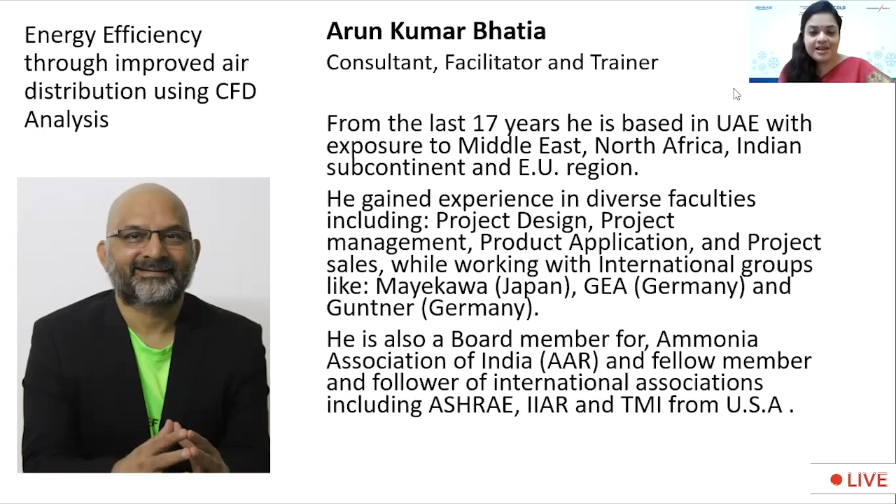Thank you, Nuremberg Messe, REFCOLD India, and entire team working in refrigeration and cold chain industry. So today's topic, which I've been given responsibility, related to air movement: energy efficiency through improved air distribution using CFD analysis. CFD analysis, I think, is still an upcoming subject. It is still a new thing for the cold chain industry, especially in our part of the world where we are currently residing. But in Europe, it is popular from a long time.

Now the topics I will talk today are divided as follows: first of all, we talk basics, which is refrigeration, and then we talk about air management, which is related to the topic. Then we come to our core subject, which is CFD, computational fluid dynamics. And then we go ahead with a few case studies just to explain whatever we have gone through. And then there'll be a question and answers. So let us start the presentation.

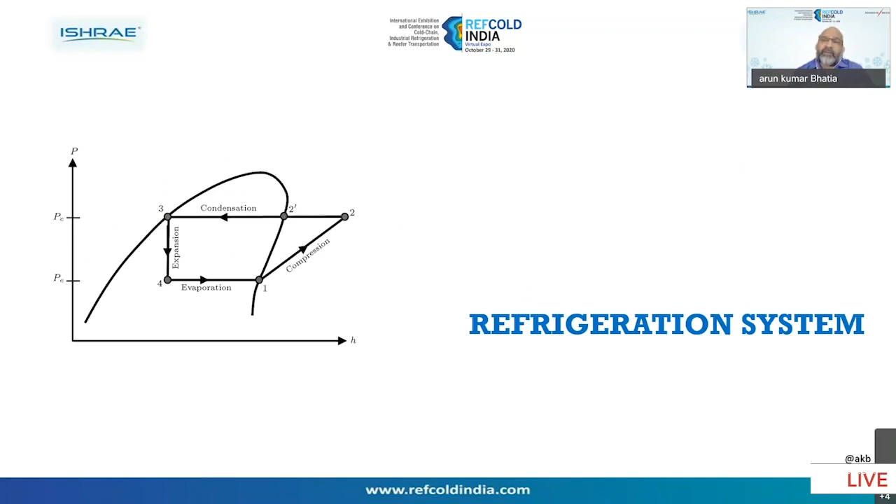So a normal vapor compression refrigeration system has a condenser, a compressor, an evaporator, and an expansion valve. And if I have to analyze the system, this is the way energy is consumed, or I must say, the stakeholders in energy consumption. So compressors, of course, will consume most of the energy, and then coils are the most important part of any cold chain or food chain application, where air coolers or air cooling coils consume a lot of energy.

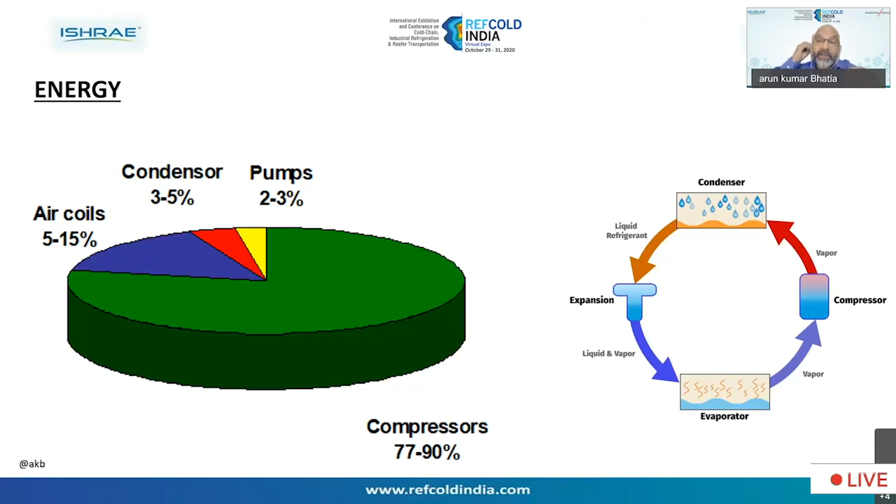So today our focus will be to understand how we can reduce, optimize, or help people understand that there is a possibility, there is a scope for us to save energy. Now this is very much related to air management. So if we are able to manage air properly inside the chamber, definitely we can save a lot of energy.

So air, as I remember, one of my mentors in Netherlands used to tell me, air is very stupid. So you just blow air, and it will go wherever it finds a path. So let us see how air behaves in a chamber and how we can get to know energy saving techniques using air management.

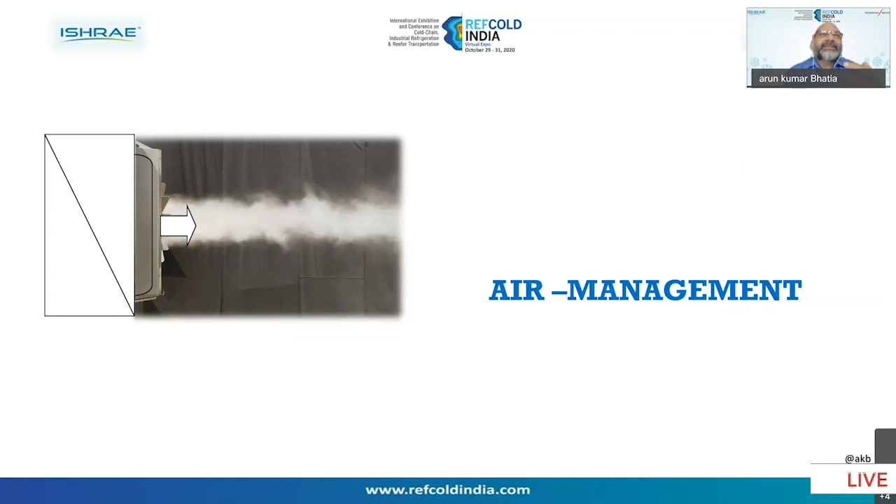So the game we are getting into is energy saving, and we have very limited scope where we have airflow, air throw, coil capacity, air temperature, and who are our opponents. The opponents inside the chamber are the racking system, the packing of the product, the size of the product, size of the store, material to be stored, and the temperatures.

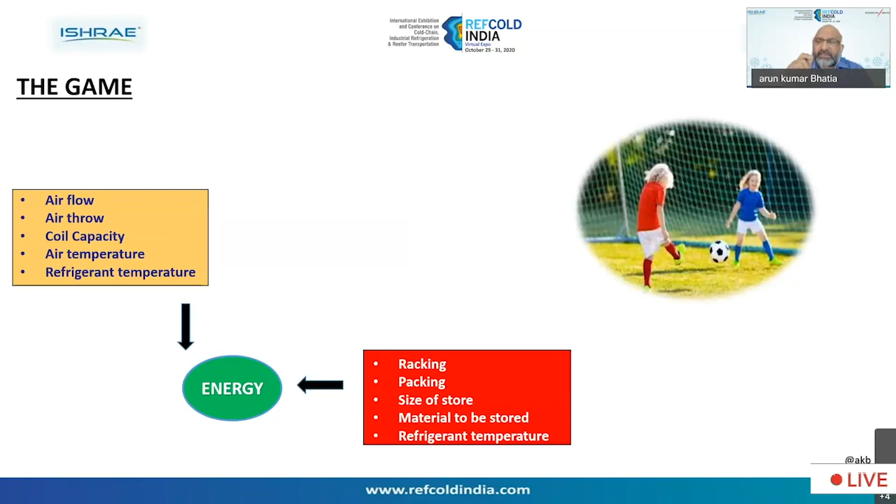I think the air evaporators, or air coolers, or AHUs, or whatever you call them, there is a tremendous scope to get energy savings here. And these energy savings can be achieved by a few simple things. Let us go ahead and understand how we can save this energy.

So what does air do in a cold store, or in a cold chamber? It goes with speed, which we call velocity. It goes with volume, we say flow, and it carries a temperature. So basically, three properties which are the most important are velocity of air, temperature of air, and flow of air. These are three important parameters or properties which we have to analyze, and this will help us define how much energy savings can be done.

Now, what I have been understanding, what I have felt, and what I learned from many research studies and from my mentors and the cold stores we have done, is that we can achieve double digit savings, which can go up to 15, 16, 17% if we do our air management in an optimized manner. So let us go ahead and see and learn.

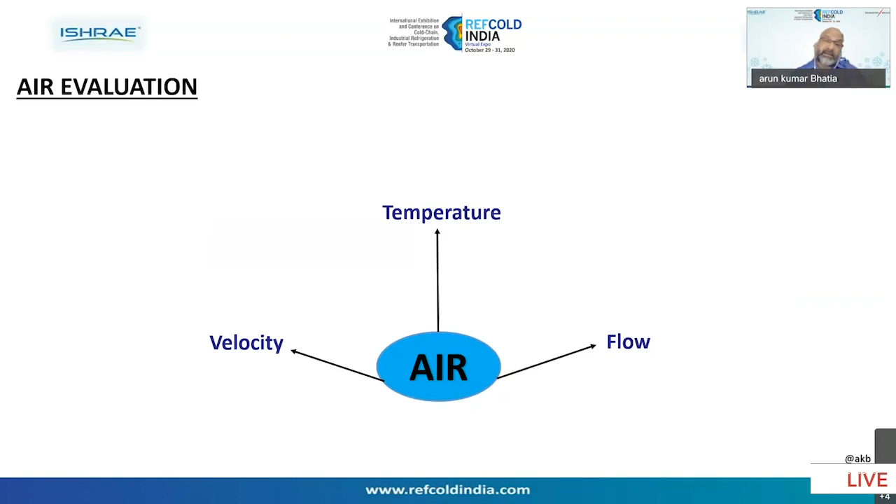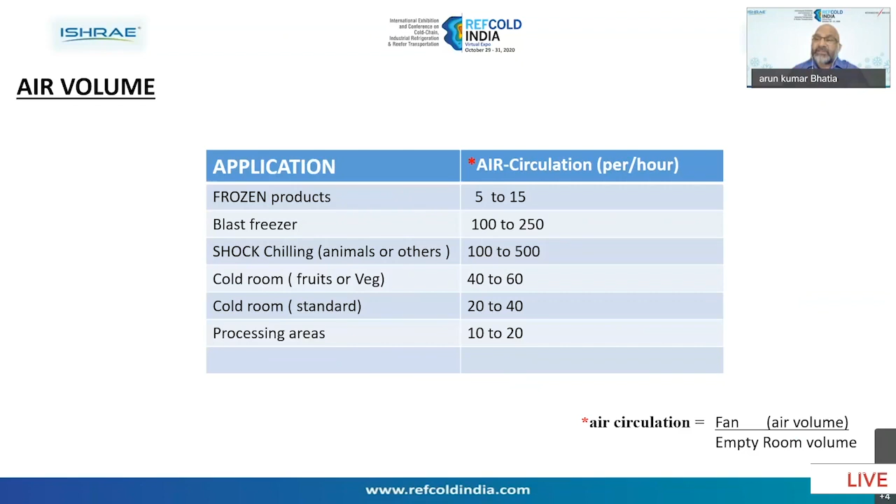Now the second important point is air throw. If we understand the name logically, it is how much air we can throw. If I am putting evaporators or air coolers at one side of the room, the end of the room should be covered. If I am producing air at -10, -5, -20 or -30°C at the exit of the evaporator or air cooler, it should be able to reach the end of the room. The product stored at the end should not face any hunger in terms of temperature management, so products in front rows get the same equal treatment, which is essential to maintain product quality.

Now in standard evaporators, we use two types: one blowing downwards and another blowing horizontally. The case studies I will take are also related to these two kinds of evaporators - one with horizontal flow of air, another with vertical flow of air.

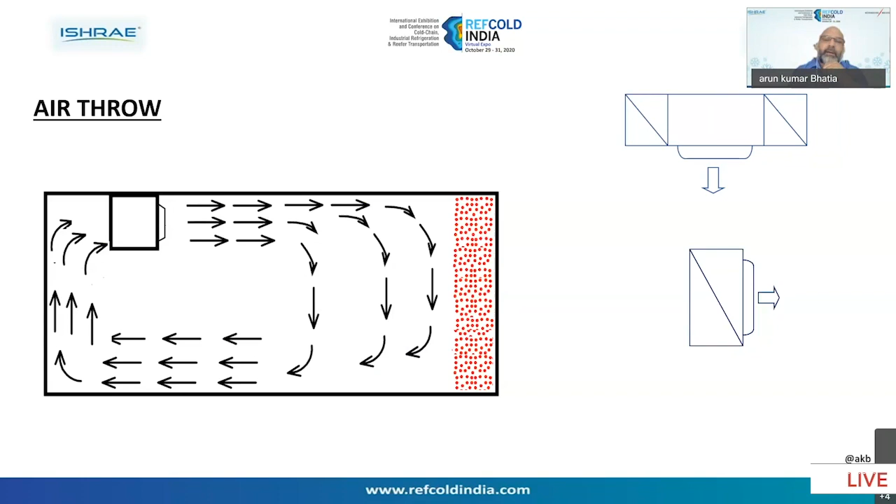The next important point is temperature management inside the cold room or chambers. If I am producing X temperature of air, it should reach the entire room, and this must return to the air cooler. If the air is not returning properly to the air cooler, there is a lot of efficiency at stake. So we have to make sure that whatever air we generate of X volume and Y degrees Celsius comes back with a proper flow.

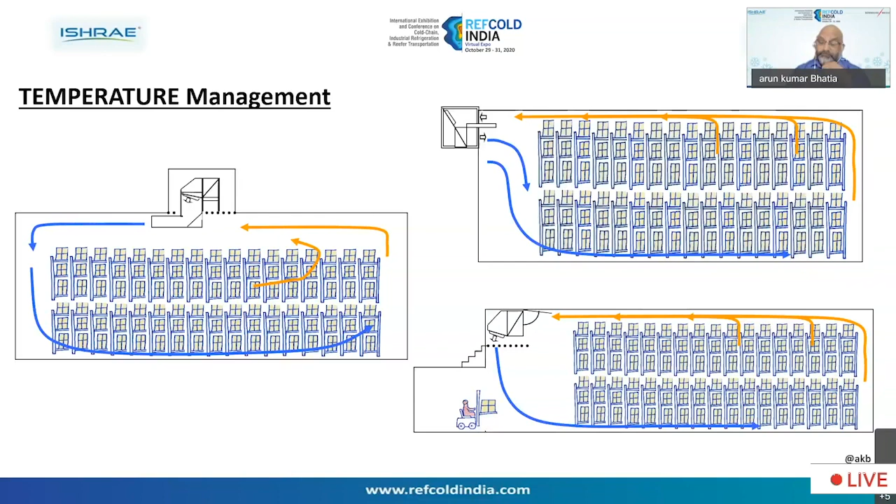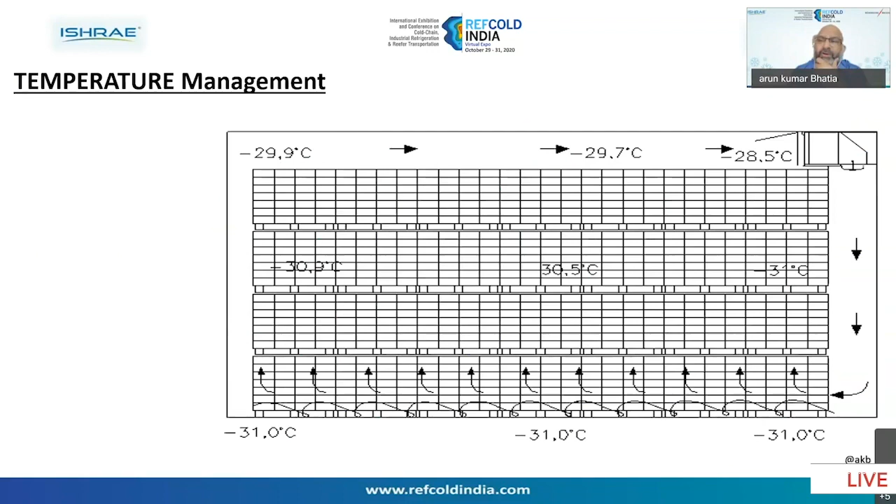Here I have shown you an example: minus 31 degrees Celsius air is given to a product and the air is coming downwards, returning back at minus 29.7 degrees Celsius. This is just a hypothetical figure - the air return temperature depends upon the refrigerant and so many other factors, even the product temperature. So air automatically comes back and goes above for suction, a phenomena we call the chimney effect, which most industry colleagues know about. This is another example of air blown downwards.

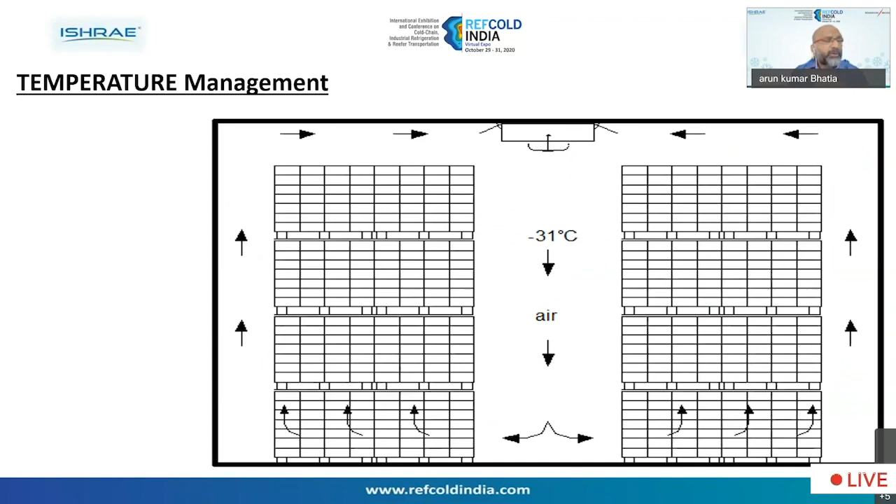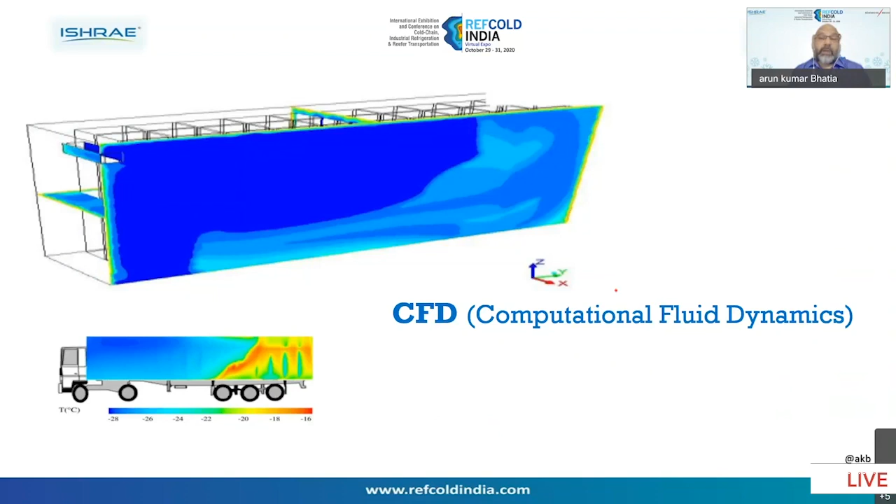Now here comes our main topic of today, which we call computational fluid dynamics or CFD. I came across these terms I think 10 years back when we used to visit for training and brainstorming sessions. I was amazed to see how companies in Europe were using this method to create efficiencies because energy costs were rising there. The challenge was how a contractor, manufacturer, engineer, consultant, or any other stakeholder in the food or cold chain can help reduce energy consumption in cold stores. So this computational fluid dynamics came into action, or rather I personally came across this term.

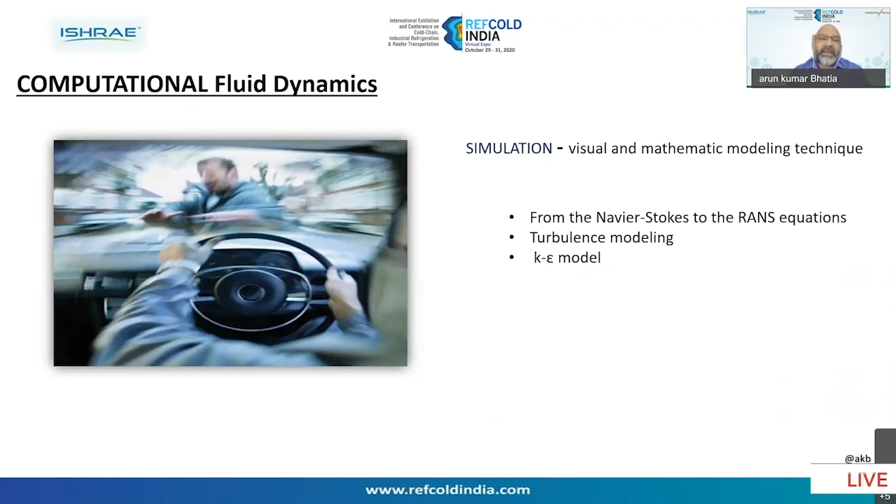So what is CFD? The first question that comes to mind - it is nothing but, if you go to developed countries, there is a driving test done virtually, right? There is a simulation. It's the same way. What we are trying to do here is work from some equations. If we go ahead and study these equations, this would be entire big sessions, and I'm not a master for that - like Navier-Stokes equations, turbulence modeling which depends on Reynolds numbers, and some other modeling techniques where we go ahead and learn and achieve what is CFD.

Now the first step in computational fluid dynamics, or CFD as I'll call it from now on - we have data for a cold store or a chamber. Every chamber we design, every racking system we put, or any product we put inside, there is always a CAD drawing we start with. As a contractor, engineer, or consultant, we start with a drawing. So CFD is also simple - the first step is to create a drawing, which can be a CAD data file or any other form of drawing.

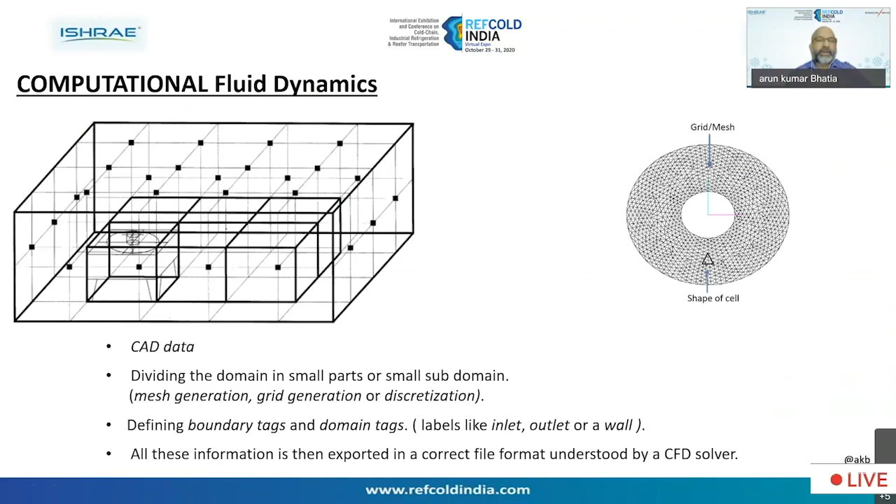Now, how can CFD be beneficial for us in a cold chain? There are many things we don't analyze on a daily basis, for example racking arrangement, packaging design, and ESP optimization. ESP is a very important factor for evaporators and fans, which helps us understand the power consumption of a fan motor. The higher the ESP, the stronger motor we need, meaning higher kilowatt, and higher kilowatt means we are consuming more power.

Airflow optimization, yes, we have already talked about it. If we have less airflow or less air volume, we cannot achieve our cooling results, we cannot achieve our product quality, we cannot achieve the desired result required for a healthy and nutritious product.

Indeed, the next important point is chamber geometry. It plays an important role, because if your chamber is larger, for example I have seen evaporators in chambers that are long, the length being like 100 meters, which for a country like India or the Indian subcontinent, personally I have not seen. And the height of the chamber could be 30 to 40 meters, which is definitely a challenge for us to understand how we do air optimization inside the chamber. So chamber geometry is very important for air temperature optimization.

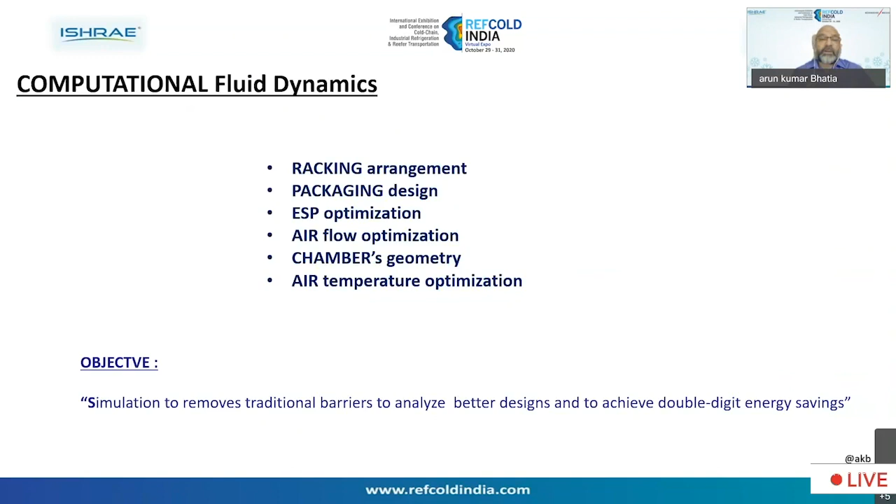So the main objective, we may conclude, is that CFD is a simulation to remove traditional barriers, to analyze better design, and achieve double-digit energy savings. So what is CFD? It means we are just trying to do a simulation before the project is done, or before it's installed. It helps us with design optimization, or anything that can help us foresee the future of our chamber and optimize the performance.

But here we are only talking about air distribution and air management using CFD. So here I have given some thermographic images which I received from some reputed manufacturers from Europe, and I have acknowledged them at the end of my slides. I cannot say the names, because that is.

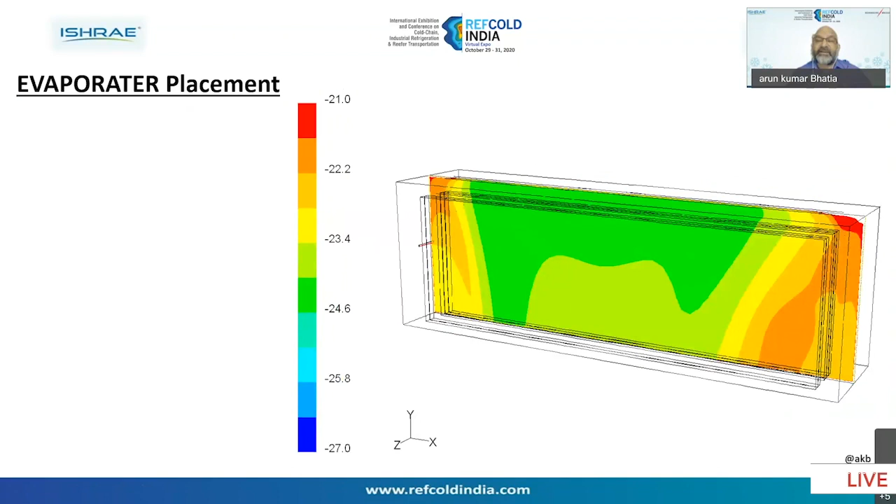In the first slide, I missed mentioning that evaporators are placed at three sides blowing into the chamber. And in the second, we see the effect here. Third, the temperature distribution can be analyzed if the evaporator is on the side wall of the chamber. Similarly, velocity streamlines: here we can see how the air is blown and seen at the end of the chamber. Below right, you may witness the velocity distribution in meters per second, as well as the chamber temperature profile.

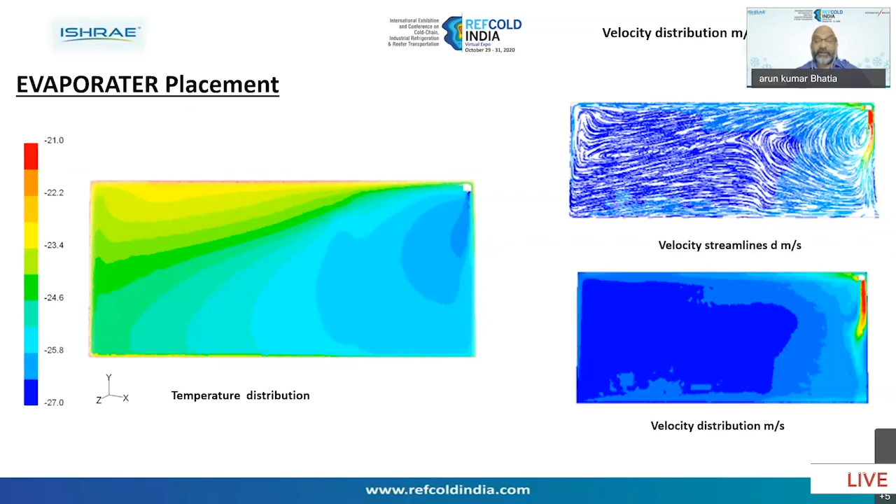So now let us move to our case study one, where we will understand a chamber of approximately 80 meter length, 40 meter width, and 25 meter height. This was a project where a manufacturer, a consultant, and the owner had already finalized an order with a reputed manufacturer in Europe.

Now they wanted to make sure the evaporator selection they made is okay, or if there are any chances to improve, optimize airflow management or temperature distribution management, or enhance the thermodynamic performance of the evaporators. I hope you remember the previous slides where we mentioned that we can achieve double-digit energy savings if we have good and efficient air distribution in the chamber.

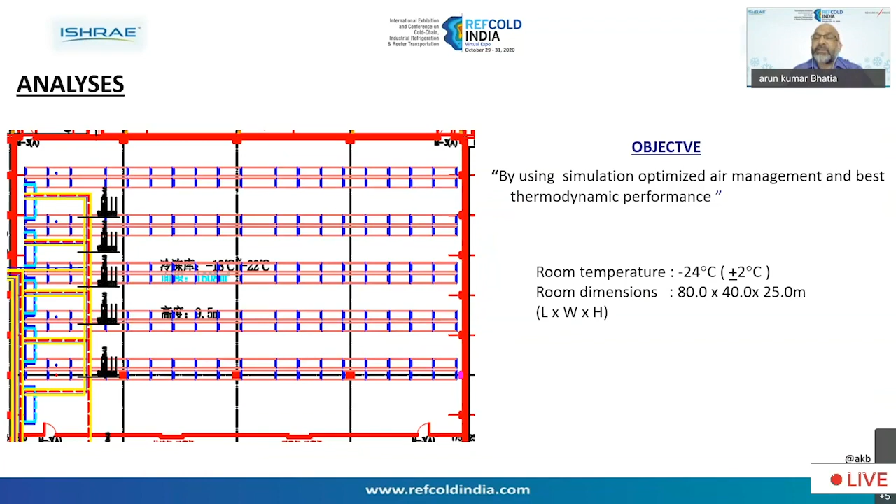Now, one thing you've noticed is that this chamber is a long chamber. If it were a small chamber, 10 meters or 5 meters, stakeholders like the owner or consultant may not bother going ahead with CFD simulation. But this is a very large chamber, and they wanted to make sure the result should be achieved. Now, this is the first thing they did as a simulator: they tried to place the evaporator on one side of the room.

Here you can witness the air is blown from an evaporator and this is going till the last end of the room. So we can visualize that most of the chamber is covered with the air.

But another important point you can understand is the Coanda effect. Most of our engineers are aware of this, but it says that whenever fluid is flowing, it has a natural tendency to go towards the extreme end, towards the walls. So if you see here, the airflow is going towards the wall of the chamber, the roof of the chamber.

But the important thing you must understand on the right hand side figure is that in the middle of the room, there is no air. As an engineer, I can analyze that the product stored there will always be staying hungry and the product will not be able to get the temperature it wants. Which means the product stored here may not be good quality, may not be as per the standards required for nutritional value, or it may be spoiled product.

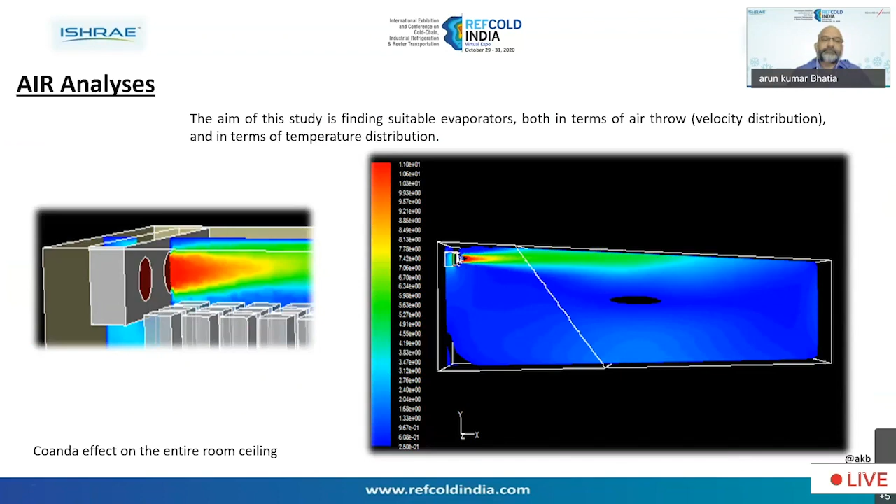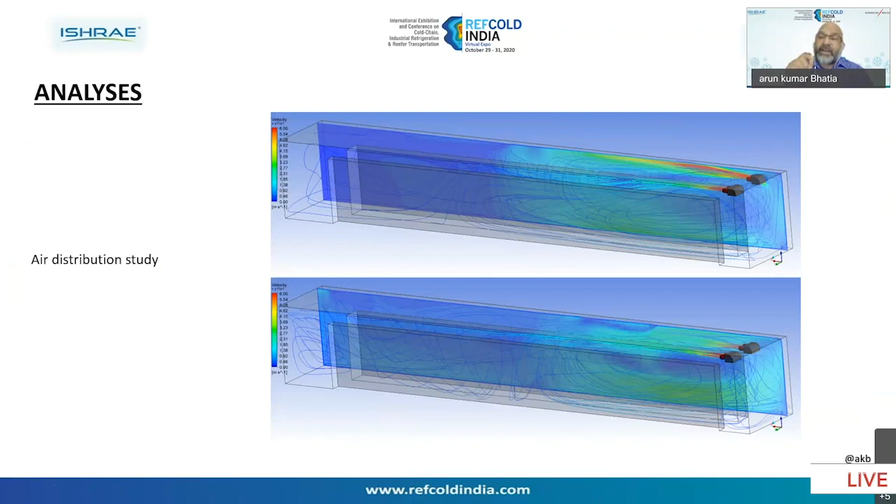So what should we do next? We should have high capacity fans, which means high capacity motors, or we try to change the speed of the fan. There are various options available, but it is the prerogative of a designer, because the designer knows what evaporators and what conditions actually exist at the site. A simulation software can only define the parameters which we put inside it.

Now, if we change the fan specifications, still, if we look at the bottom, if we are increasing the velocity by changing speed or other measures, then we can observe at the bottom there are zones.

If you see these lighter color zones, there is not enough temperature management. When I say temperature management, we are not able to manage the temperature of the product lying on the racks. For example, if I have stored ice cream at -25 and the manufacturer specification is that stored temperature should be -22 plus minus 1 degree or -24 plus minus 1 degree, I cannot go below certain recommended temperatures. Because if that particular ice cream goes below a certain temperature range, it may lose its properties, which means losing taste in a layman's understanding.

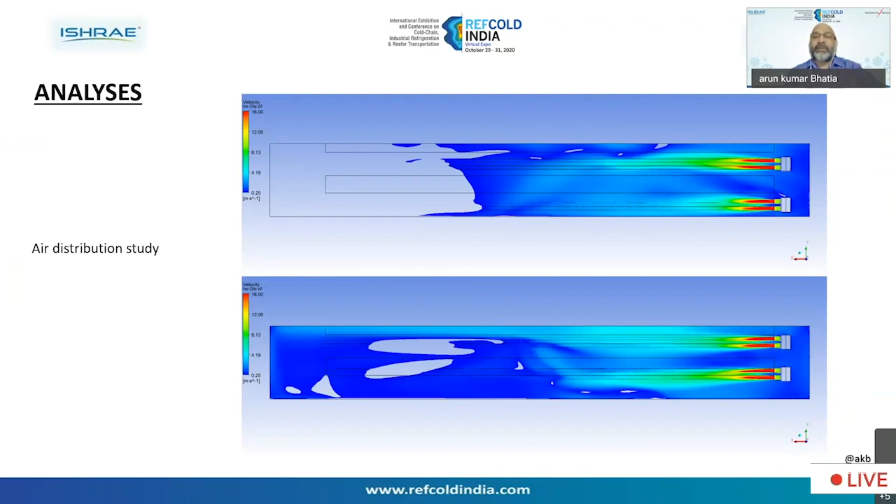In a food technologist's understanding, it loses its structure, which is healthy and has nutritional value. So what will the designer do? The designer has studied these evaporators in different simulations with higher airflow, lower airflow, extreme velocity - he is not able to do justice to the chamber. So then he does another, the same test. He has seen the velocity streamlines.

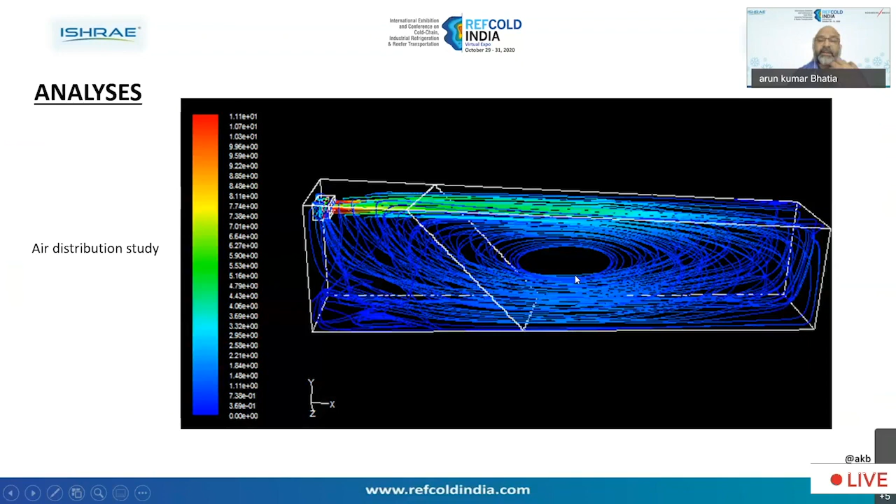Here also we can observe the same way. The first slide showed that there are a lot of places where temperature is not maintained. So in this case study we can understand that we can create a correlation of air throw, air volume, and air temperature.

So what the designer has done in this case is conclude that it is always better to put two evaporators at two different extremes - for example, two evaporators on the left hand side of the chamber, and two evaporators on the right hand side of the chamber. That was the best solution we could achieve in this particular case, as it was commercially viable, and it also resulted in a lot of energy savings.

The positioning of evaporators were decided agreeably by the evaporator manufacturer, the consultant, and the owner. So, by simple study, we are able to find out what is the best suitable evaporator.

Now the question comes to my mind: why don't we do this in normal chambers? I think because in smaller chambers, there is no challenge in sending air or maintaining air volume. But in larger chambers, this is a real challenge.

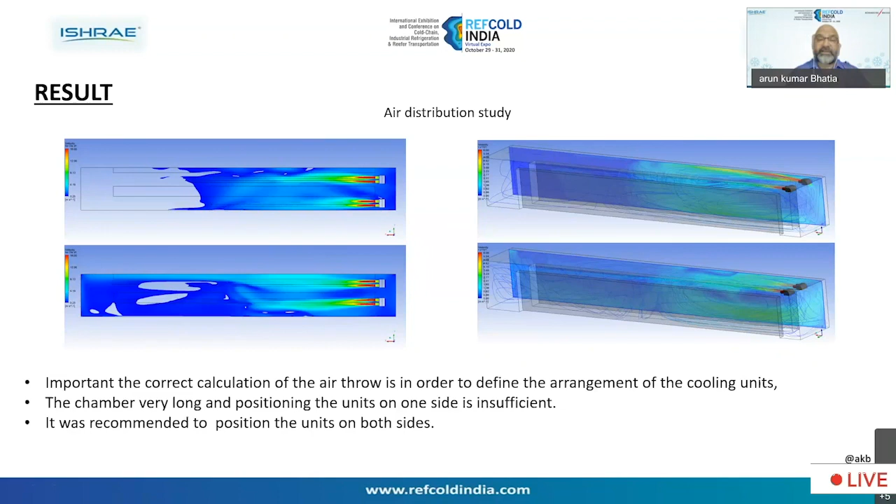So in this case study one, we can conclude that the placement of evaporators can be studied using CFD analysis, and by this we are able to achieve our desired results, which is ultimately the game of power saving, and we have to be responsible.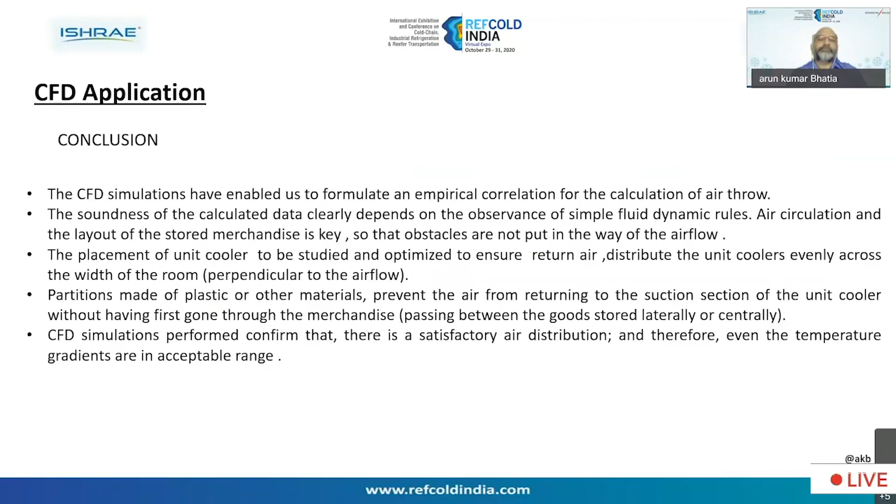Now let's move ahead with another case study. This is the case study which was done by a university, and I have already acknowledged their names. In this case, we are going to study the simulation of air and temperature inside a pre-cooling chamber.

Here we are not only going to study the air management or temperature management, but the most important thing is how a product is able to get enough air to stay thermodynamically healthy.

In this study, there was a simulation done for pomegranate cooling. The pomegranate pre-cooling requires a specific temperature, airflow, and evaporator placement.

So in this study, we had certain types of boxes. In these boxes, we had done careful study previously that the air should flow inside them, cooling the pomegranates, and these boxes can be modified or redesigned to help temperature management and airflow management.

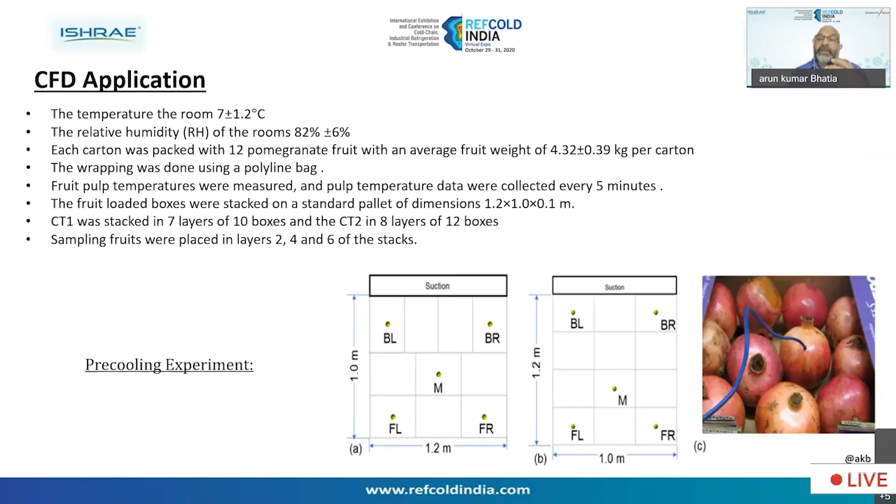And then we went ahead, and what we found was very interesting: that CT2 type of packaging has the lowest pressure loss. Pressure is very important for air management. In this case, the design of the box - a particular design, which we'll also see in the next slide - had a higher pressure resistance.

So if I am pushing air through the boxes and it is taking a lot of effort and power, that means I have to put a higher capacity fan. So an evaporator can come with a 5 kilowatt fan, or it can come with a 7 kilowatt fan. The design of a box or racking arrangement can increase or decrease maybe 20% of power consumption for a fan.

So this was the only objective, to study this type of packaging design. If you look at the graph, you can see CT2 has the highest loss, which means they have to use a higher capacity fan to achieve the same result, which in case of CT2 is with lining.

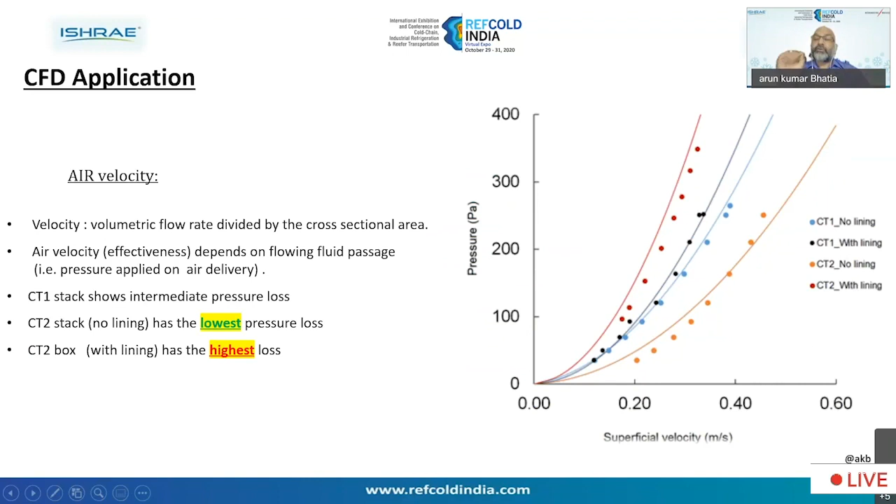Now this was the CFD which was done. If you observe the velocity - in the blue case we put a 0, the same way we put in PLC sensor setting parameters, 0 is the lower limit and whatever highest limit we can set. So 0 to 5 meters per second velocity was the target for forced air cooling.

The air is pushed from the left hand side and exits from the other end, resulting in pre-cooling of the pomegranate and helping it stay longer in a cold storage or cold chain. If this was done at a post-harvesting site, closer to the farm, this is very necessary for the food chain, cold chain, or food security.

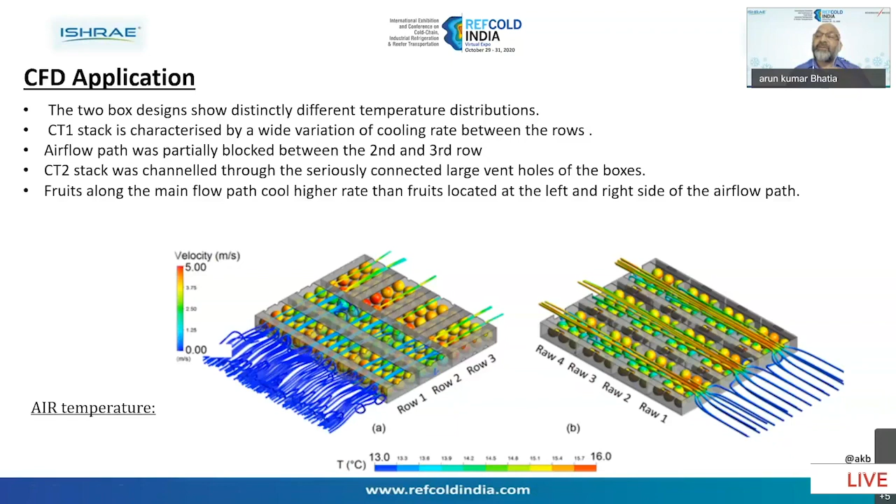Now, modification of vent holes. These were the holes which were inside the carton box. If we go back to this slide, you see there are different arrangements of holes here, and carton B has a different arrangement of holes.

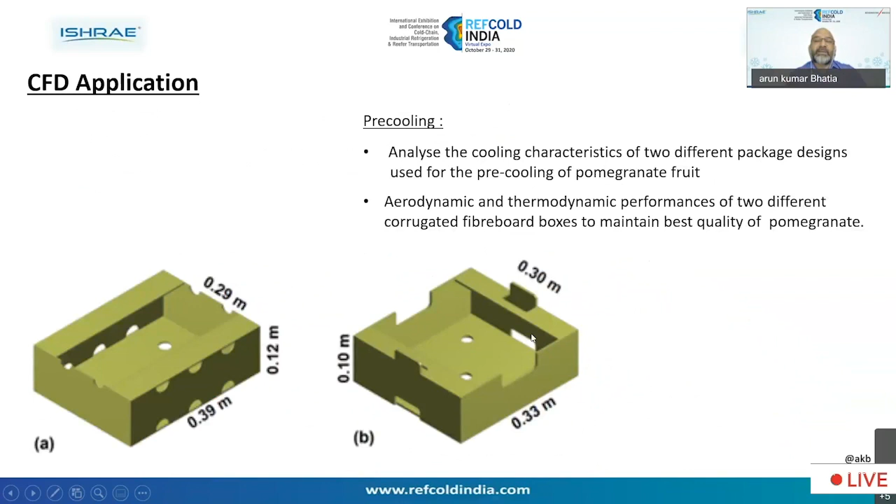So now we have done some modification in both container 1, which is A, and container 2, which is CT2. By doing this hole modification, or temperature management, we have redesigned container 1. Now you see there was a model and there is a B, which we have done certain modification on.

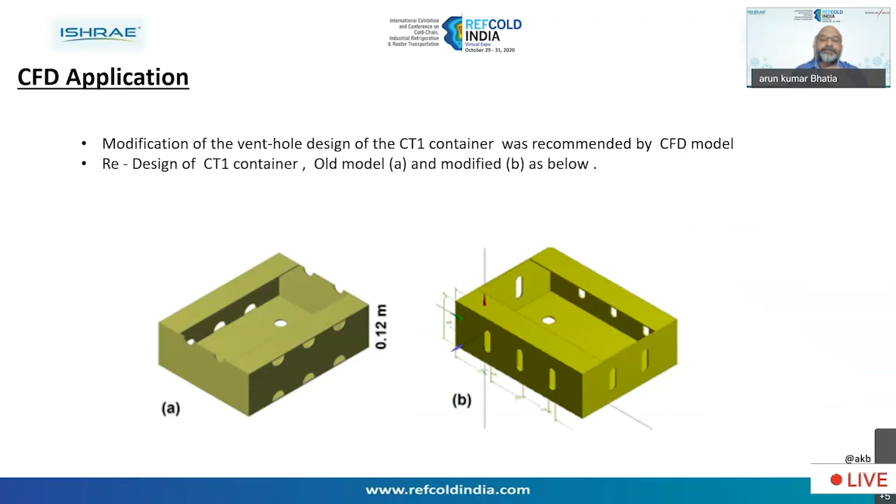Now the round is changed into vertical ones, just to make sure air management can be maintained properly, resulting in power savings. And we found interesting results. Redesigning the CT1 box helped us do wonders. I was even surprised, because I was not personally aware that even CFD simulation done with the packaging can help us save that much power.

Yes, and now you can see in simulation A, some products are not able to get enough air. That was due to the boxes which were not properly designed. In the redesigned box, you can see there is enough cooling on each product. Which was the product? It was pomegranate, and we are able to achieve enough air cooling.

These two results are not concluded very easily. The simulator, the engineer, had to do a lot of simulations to reach this level and to conclude the most efficient manner that we are pushing air at 7 degrees Celsius, and that air should be transferred to the product, which is pomegranate in this case.

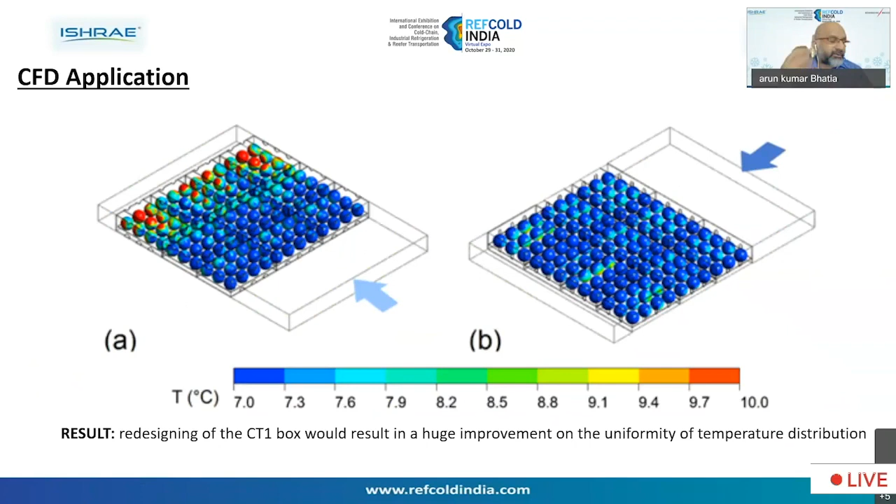Now, what was the conclusion from this case study? The conclusion drawn was that the pressure losses, airflow patterns, and temperature distribution can be achieved by force cooling of pomegranate in an efficient manner if you use CFD in a proper way.

Now, the pomegranate was packed with a lining. A lining is kind of a polythene wrapping done on a product to make sure that when we are force cooling the product, there is moisture which can be escaping from it. Most refrigeration engineers and designers understand this phenomenon: because of temperature difference, the moisture will escape the surface of the fruit.

So to avoid that, farmers were using the lining, which was a polythene lining. But the way they were using it, there were a lot of velocity losses, and the temperature and airflow management was not used properly. So our external static pressure on the air was so high that we were consuming more power.

So by CFD simulations, we highlighted and understood that it is essential and most important that we understand the design of packaging is very important in airflow management. Even smaller details like plastic lining, packaging, and crate arrangement are essential, and it is a key parameter which can help us reduce power consumption.

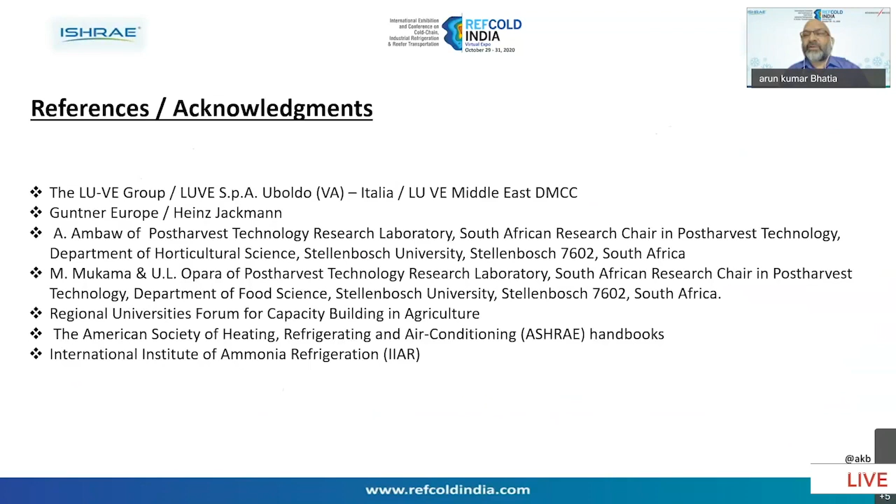The second question I can see in the chat box is, can we use thermography as a validation for CFD design? I'm trying to understand, but whatever my knowledge is - as I always believe, we have one of the best brains, particularly in the Indian context. India has got the best technical brains.

So setting up a lab or any simulation mechanism is not at all difficult, because although people say there are challenges about intelligence or intellectual things, that point I will not consider in terms of India. But yes, there is a lot of cost involved with it. I think we are among the best software engineers.

I think we should encourage, or we should have some simulation software designers in India. As an industry, or as ISHRAE - which is a very positive organization - they can take this step and help, maybe take this mission further by setting up young software engineers and students. But currently there are some simulation softwares available, though they are highly expensive. As far as I know, they cost around 40 to 60,000 euros, which I think is not justifiable.